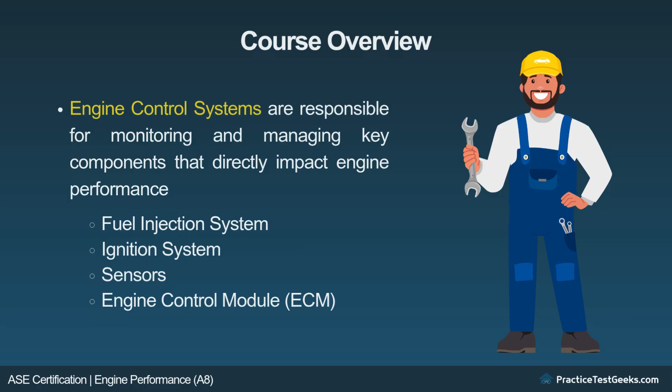These include the fuel injection system, ignition system, sensors, and the engine control module. Understanding how each of these components works, how they interact, and how to diagnose issues is key to maintaining optimal engine performance. This lesson will dive into each of these systems, providing foundational knowledge to help you effectively diagnose and troubleshoot engine performance problems. Fuel injection systems.

Fuel injection is a critical component in modern engines, replacing carburetors to deliver precise amounts of fuel to the engine's cylinders. The fuel injection system works in tandem with the engine control module to optimize fuel delivery based on various engine conditions. Function of fuel injection.

Fuel injection systems are responsible for mixing fuel with air in precise amounts to allow for efficient combustion. The engine's ECM controls fuel delivery based on inputs from various sensors. Types of fuel injection systems.

Single-point fuel injection: fuel is injected into the intake manifold near the throttle body, where it mixes with air before entering the cylinders. Multi-point fuel injection: each cylinder has its own fuel injector that directly injects fuel into the intake manifold, providing more precise fuel control. Direct injection: fuel is injected directly into the combustion chamber, allowing for more efficient combustion and better fuel economy.

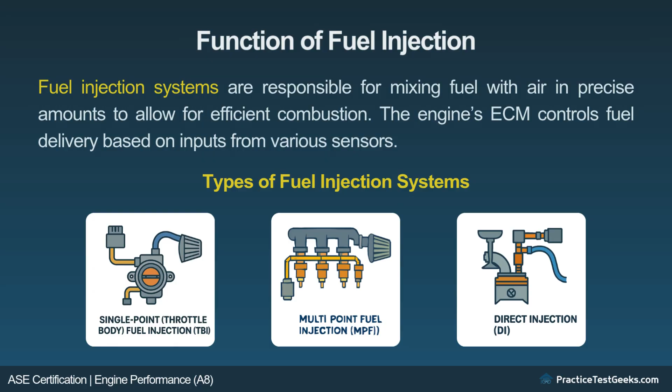Key components of fuel injection systems. Fuel injectors: the injectors are responsible for delivering fuel to the engine in a precise spray pattern. These are controlled by the ECM, which regulates the timing and duration of the injection.

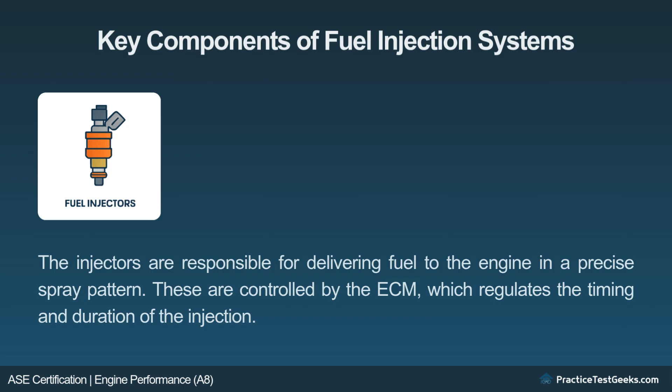Fuel pump: the fuel pump supplies fuel from the fuel tank to the fuel injectors under pressure. Fuel pressure regulator: this component maintains the fuel pressure within the system to ensure consistent fuel delivery. Fuel filter: the fuel filter removes impurities from the fuel to prevent clogging of the fuel injectors.

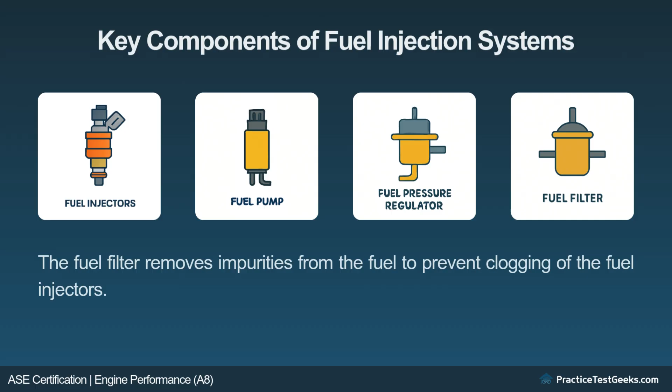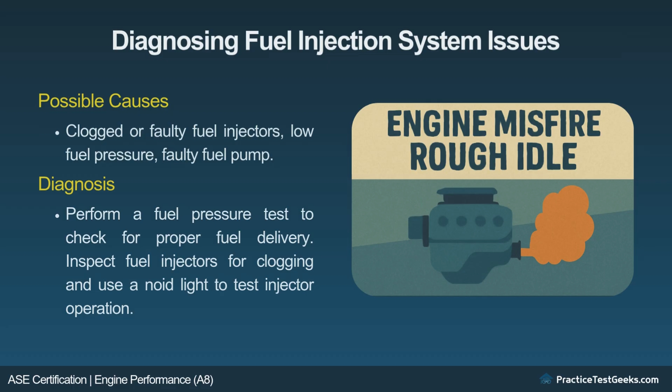Diagnosing fuel injection system issues. Symptom: engine misfire or rough idle. Possible causes: clogged or faulty fuel injectors, low fuel pressure, faulty fuel pump. Diagnosis: perform a fuel pressure test to check for proper fuel delivery, inspect fuel injectors for clogging, and use a Noid light to test injector operation.

Symptom: poor fuel economy. Possible causes: faulty fuel pressure regulator, malfunctioning sensors, or improper fuel mixture. Diagnosis: check the oxygen sensors, mass airflow sensor, and fuel pressure regulator to ensure the engine is receiving the correct fuel-air ratio.

Ignition systems. The ignition system provides the spark necessary to ignite the fuel-air mixture in the combustion chamber. The system includes components such as spark plugs, ignition coils, and the ignition control module.

Function of the ignition system. The ignition system ensures that the engine's spark plugs fire at the correct time to initiate combustion. It must provide enough energy to create a spark that can ignite the air-fuel mixture, ensuring that the engine runs smoothly.

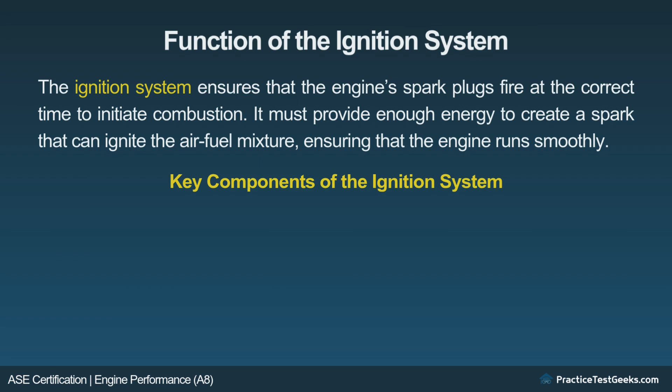Key components of the ignition system. Ignition coil: converts low voltage from the battery into high voltage that is sent to the spark plugs. Distributor: in older systems, the distributor directs high voltage to the correct spark plug. In modern systems, this function is often replaced by individual coils for each cylinder.

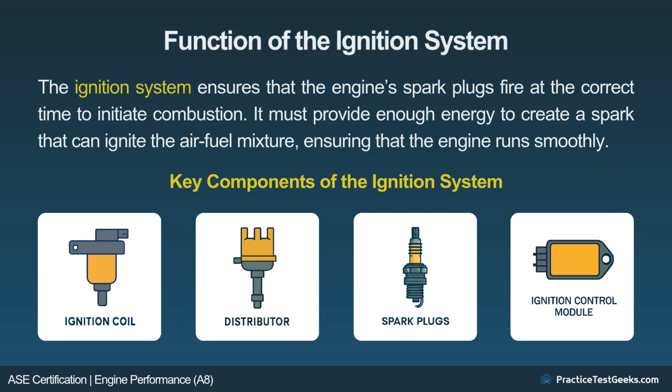Spark plugs create the spark that ignites the air-fuel mixture in the engine cylinders. Ignition control module: the control module regulates the timing of spark generation based on inputs from sensors such as the crankshaft position sensor.

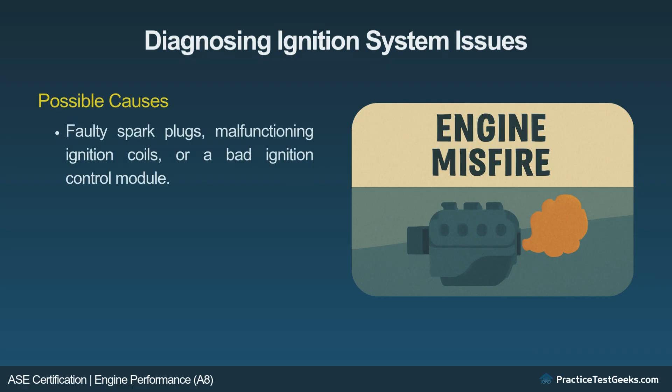Diagnosing ignition system issues. Symptom: engine misfire. Possible causes: faulty spark plugs, malfunctioning ignition coils, or a bad ignition control module. Diagnosis: inspect spark plugs for wear or carbon buildup, use a spark tester to check for spark at the plug, and test ignition coils and the ignition control module for proper function.

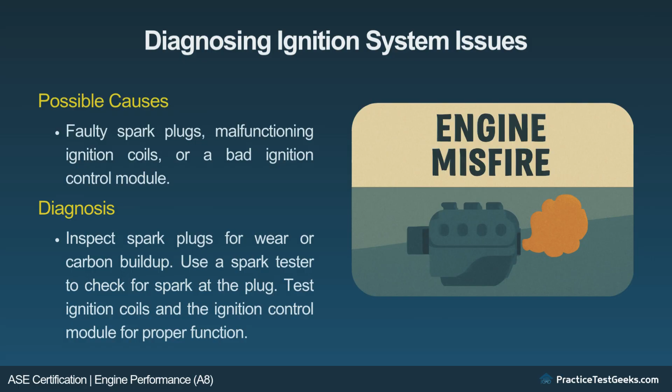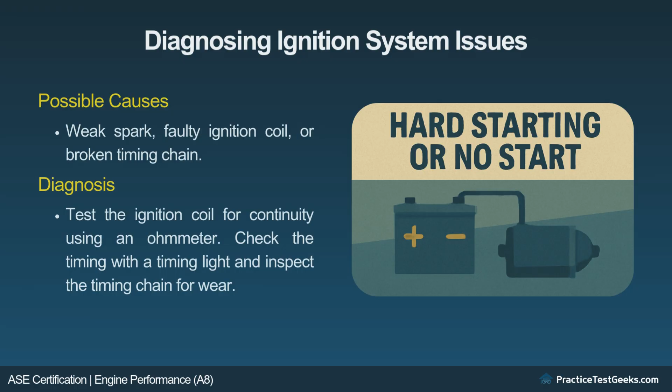Symptom: hard starting or no start. Possible causes: weak spark, faulty ignition coil, or broken timing chain. Diagnosis: test the ignition coil for continuity using an ohm meter, check the timing with a timing light, and inspect the timing chain for wear.

Sensors and ECM. The engine control module is the brain of the engine, using data from various sensors to control the operation of the fuel injection and ignition systems. The sensors collect real-time data on engine performance, which the ECM uses to make adjustments that optimize fuel efficiency, performance, and emissions. Types of sensors in the engine control system.

Crankshaft position sensor monitors the position and speed of the crankshaft to determine the timing of fuel injection and spark. Camshaft position sensor works in conjunction with the crankshaft position sensor to determine the position of the camshaft, which helps with fuel and ignition timing.

Oxygen sensors monitor the exhaust gases to ensure the air-fuel ratio is optimal for combustion, and send data to the ECM to adjust fuel delivery. Mass airflow sensor measures the amount of air entering the engine to help the ECM calculate the correct amount of fuel for combustion. Coolant temperature sensor monitors engine temperature and helps the ECM regulate fuel injection timing and air-fuel mixture.

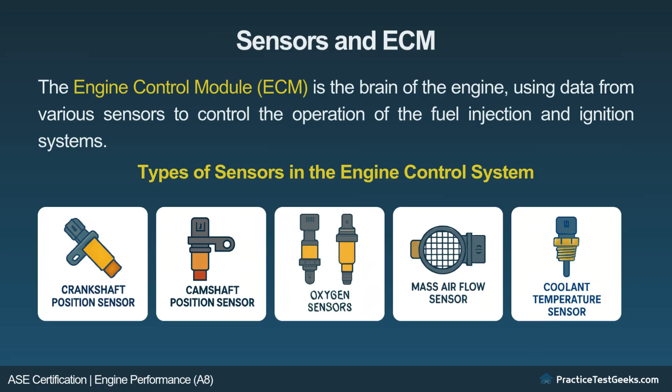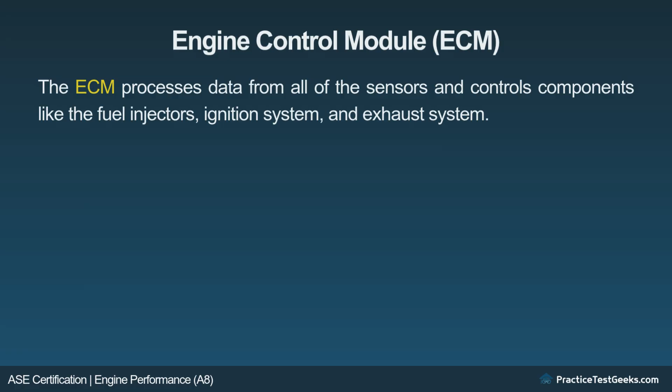Engine control module. The ECM processes data from all of the sensors and controls components like the fuel injectors, ignition system, and exhaust system. How it works: the ECM adjusts various parameters to ensure optimal engine performance, including fuel mixture, ignition timing, and idle speed.

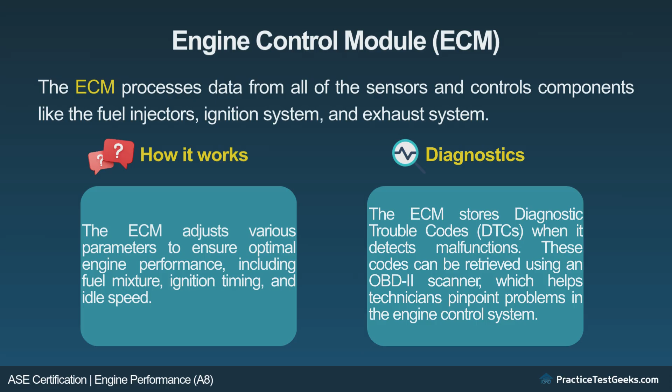Diagnostics. The ECM stores diagnostic trouble codes when it detects malfunctions. These codes can be retrieved using an OBD2 scanner, which helps technicians pinpoint problems in the engine control system.

Diagnosing sensor and ECM issues. Symptom: engine running rich or lean. Possible causes: faulty oxygen sensor, mass airflow sensor, or coolant temperature sensor. Diagnosis: use a scan tool to retrieve DTCs from the ECM and check for sensor malfunctions, and perform voltage tests on the sensors to ensure proper operation.

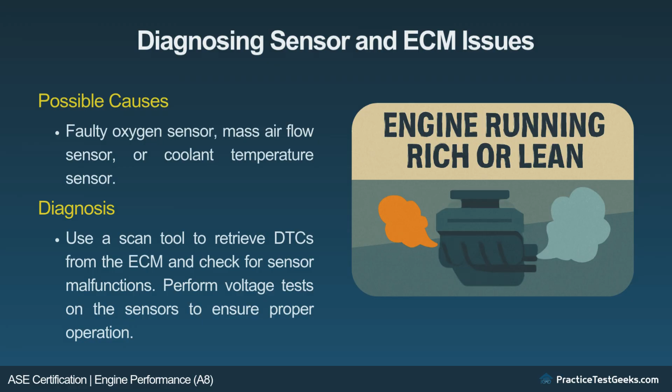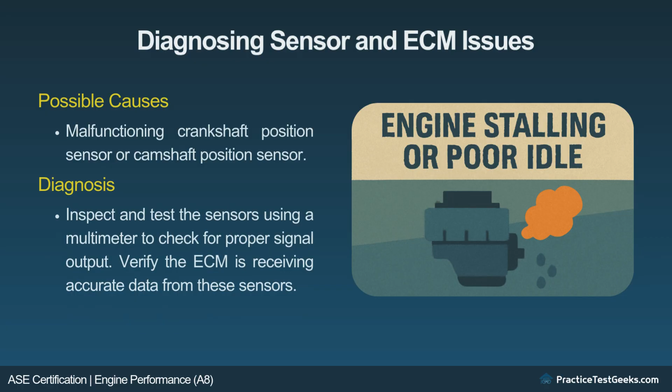Symptom: engine stalling or poor idle. Possible causes: malfunctioning crankshaft position sensor or camshaft position sensor. Diagnosis: inspect and test the sensors using a multimeter to check for proper signal output, and verify the ECM is receiving accurate data from these sensors.

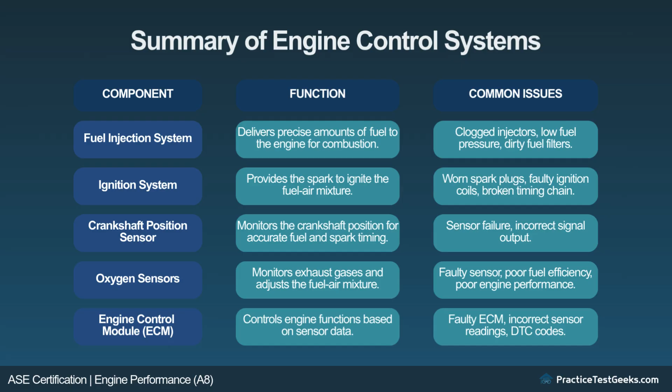Summary of engine control systems. Here's a table showing the summary of engine control systems. You can pause the video if you want more time to review the table.

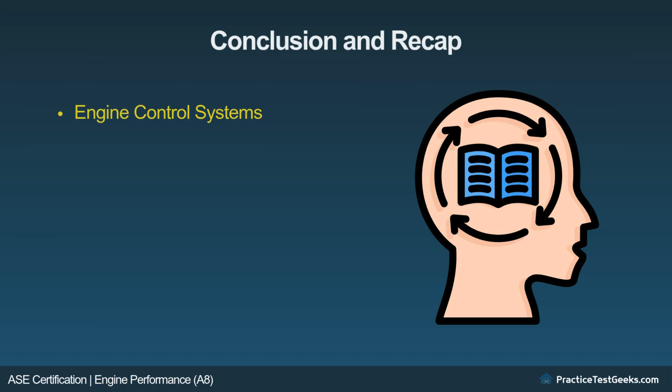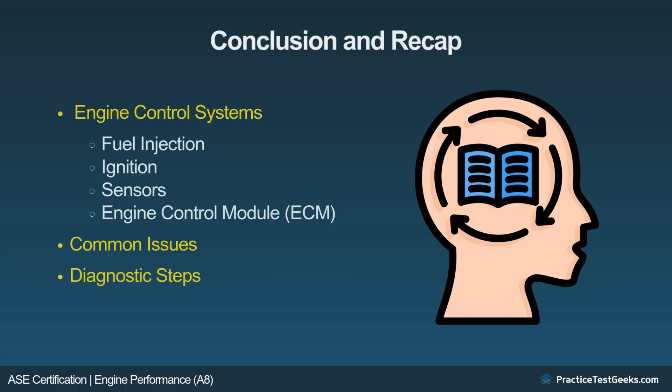Conclusion and recap. In this lesson, we explored engine control systems, including the operation of fuel injection, ignition, and sensors, and the role of the engine control module. We also discussed common issues related to these systems and diagnostic steps to resolve them. A strong understanding of these systems is essential for troubleshooting engine performance issues and is critical for ASE certification test A8.